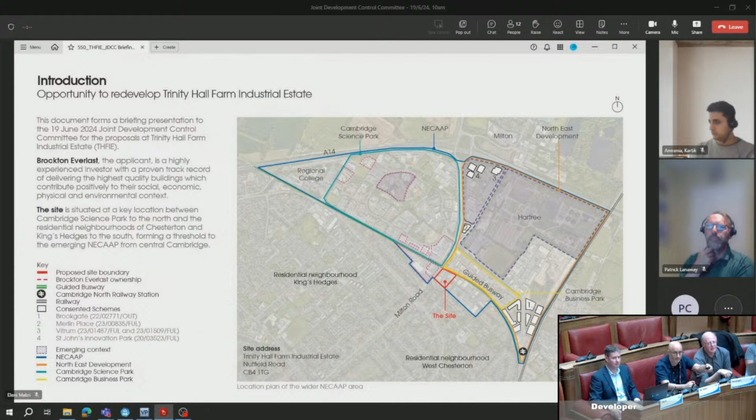This is a slightly more expansive view of the site. It covers a little over 3 acres and is 40% covered by buildings, predominantly low quality light industrial and commercial buildings. The balance of the site is made up of hard standing areas which are used for servicing the light industrial and commercial units and 158 vehicles.

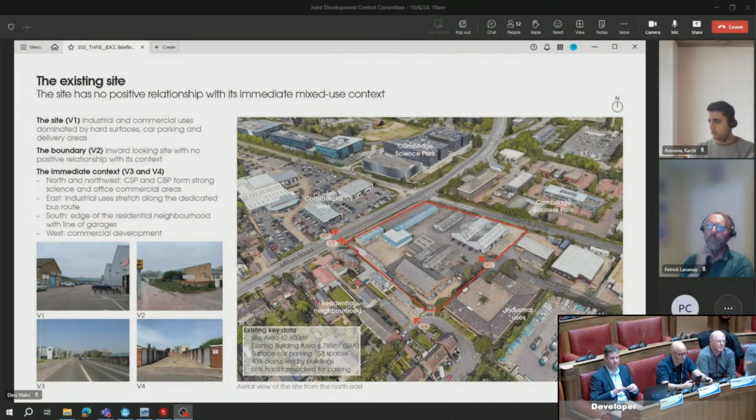We consider this to be a strategically important site that's definitely underutilised and fails to make any kind of positive connection to its existing and perhaps emerging mixed-use context. The opportunity or vision for us is to redevelop the site and deliver an urban quarter of best-in-class, highly sustainable science and technology buildings. But we want to make sure the proposals also positively respond to the site's distinctive and varied boundary conditions and take into consideration the wider current and future urban context.

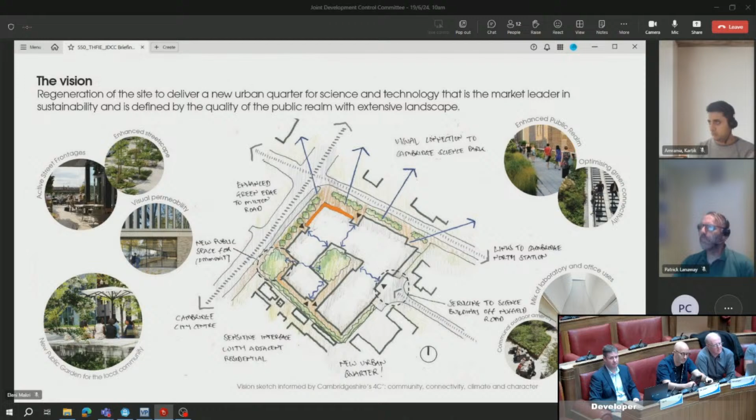I'm going to hand you over now to our lead designer, Gavin Henderson of Stanton Williams, and he'll explain in way more detail our design response.

Thank you, Richard. So Richard's outlined some of the key vision behind creating this new urban quarter. I'm going to talk about it in a bit more detail.

Firstly, I want to explain some of the key principles underpinning the scheme. Then we're going to walk you through key views of the scheme, all from street level. It's all about the human perspective, from the member of public or the building user. That's central to our approach. And finally, we're going to touch on some long-distance views, LVIAs and TVIAs, because those have been central to the discussion with the planning officers and setting the heights and massing of the buildings.

In terms of those key principles, sustainability is at the heart of our approach and of Brockton's vision for the scheme. This is a net zero carbon development, which aims to set a new benchmark in terms of environmental performance for developments in Cambridge. We're targeting the highest levels of accreditation and very high levels of performance. There isn't time to go into detail, but the key thing is all project targets exceed current planning policy and meet emerging policies.

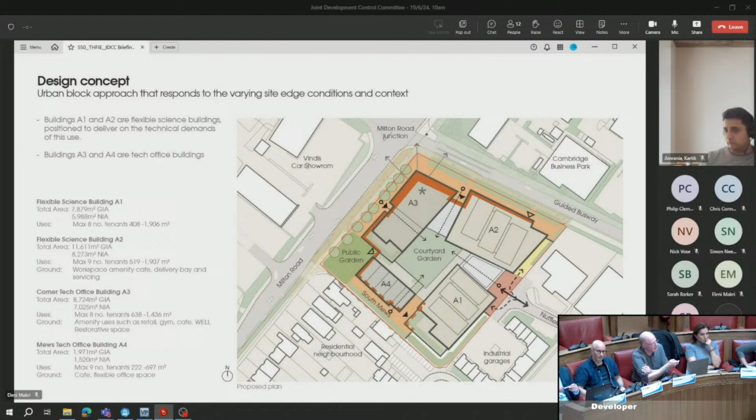The building we identify here as A3 is a corner building which marks that junction. We envisage this as a family of buildings, differentiated in language, but sharing a palette of brickwork and precast, which draws on the traditional materiality of the Cambridge context.

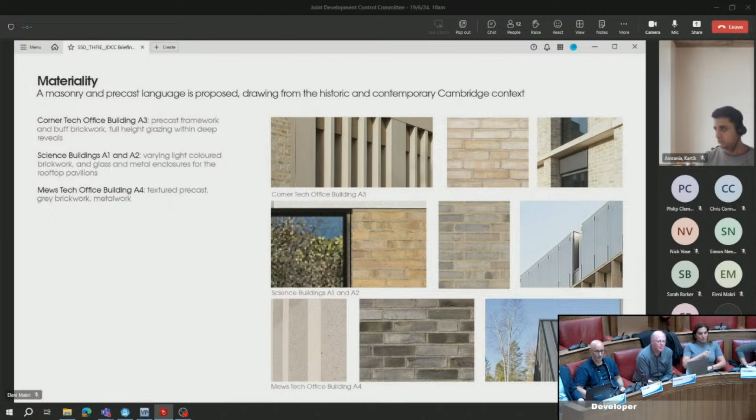And it's very much a landscape-led approach to the scheme as a whole. So 50% of the site is given over to landscape rather than building. That supports our biodiversity and SUDS strategies.

The landscape strategy is about enhancing the public realm and creating active ground floor uses, including cycle entrances and receptions and retail spaces.

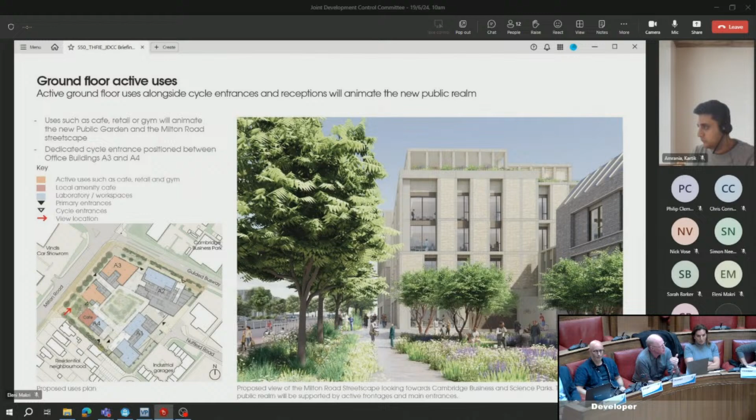This is the view along Milton Road, and that is part of this wider landscape strategy, about reimagining the public realm. So this is that public garden opening off Milton Road, and as a scale comparison, it's a very similar size to All Saints Garden in central Cambridge.

It's a very different context, and I'll come back to this space later, but a real opportunity to create a space for the community here and a space where the community engages with the scheme.

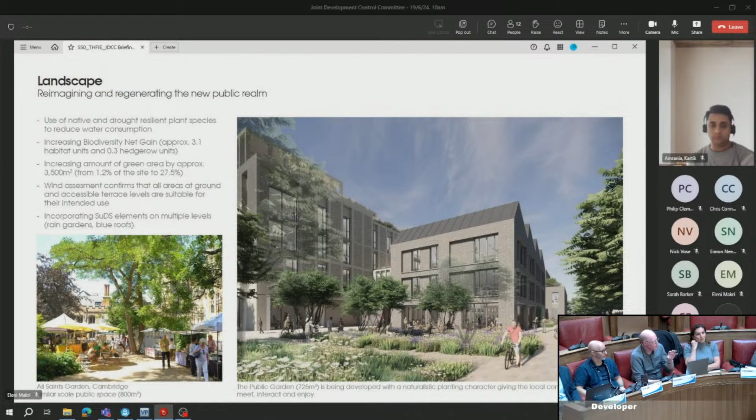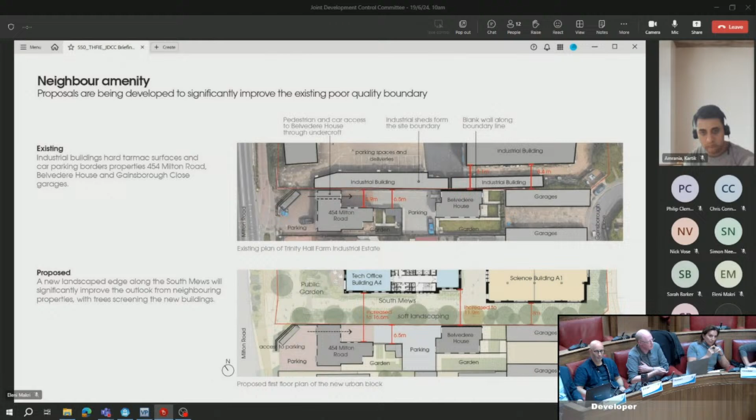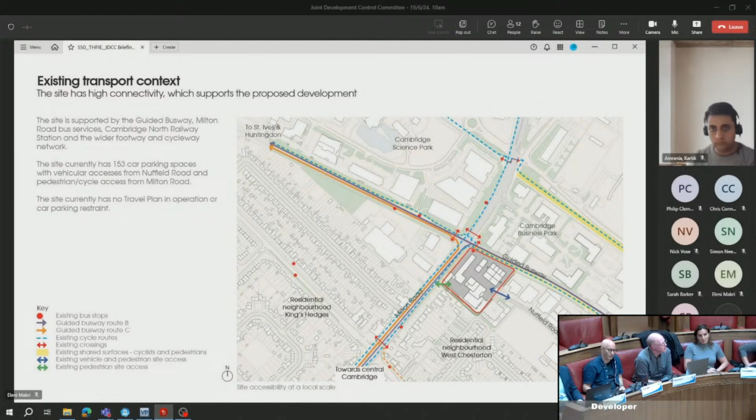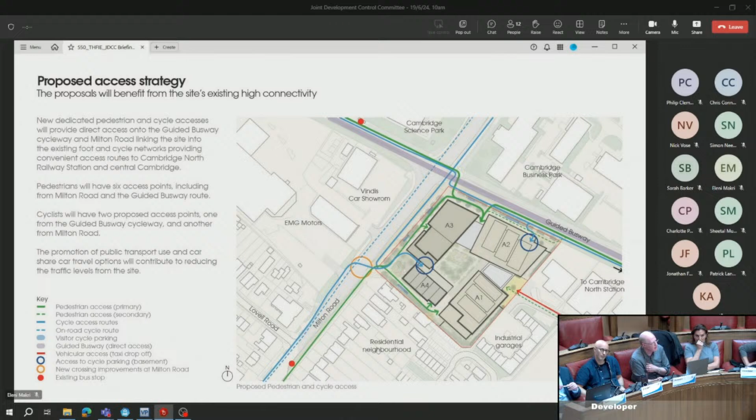Taking a step back now from the site itself, in the broader context, it has very high connectivity, which supports the proposed development. That's informed our access strategy to the site. We have principal pedestrian and cycle entrances on the guided busway and Milton Road, and a single vehicular access from Nuffield Road.

The high connectivity is also allowing us to create a modal shift towards more sustainable forms of transport, so you can see here a great increase in proportion of cycling to the site. We're also delivering a 50% reduction in terms of car parking on site, with a commensurate reduction in vehicle movements and trips. The remaining car parking and cycle parking is located at basement level, which is what's allowing us to deliver the very high quality public realm. And of course, we're encouraging the cycling through very clear, legible and welcoming facilities.

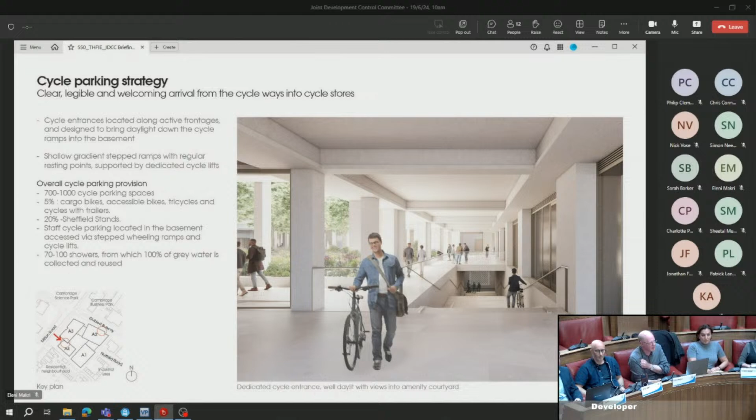This is one of the arrival points off Milton Road, heading down into that lower level cycle parking facility.

In terms of height and massing, that's been a key discussion with the planning officers. What we've agreed is an evidence-based approach, looking very closely at LVIAs and TVIAs, the long-distance views. So it's been an intensive and iterative process, and I'll come back to that later, and it's defined the heights of our scheme. At the lower level here, you can see a section that shows on the left the heights of our scheme in relation to other emerging projects within the adjacent areas.

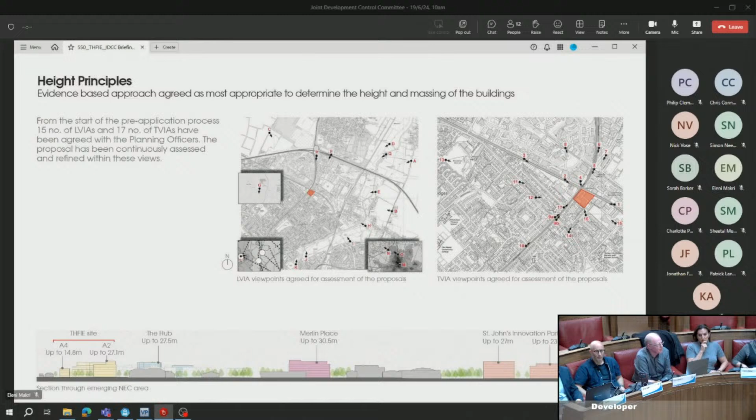I think key to this is that it's not a single height to all the different buildings in the block. It's very much a varied roof line, stepping up and down and stepping from taller buildings to the north, adjacent to the guided busway, and then lower buildings to the south, adjacent to the Chesterton residential area, which is what you can see here.

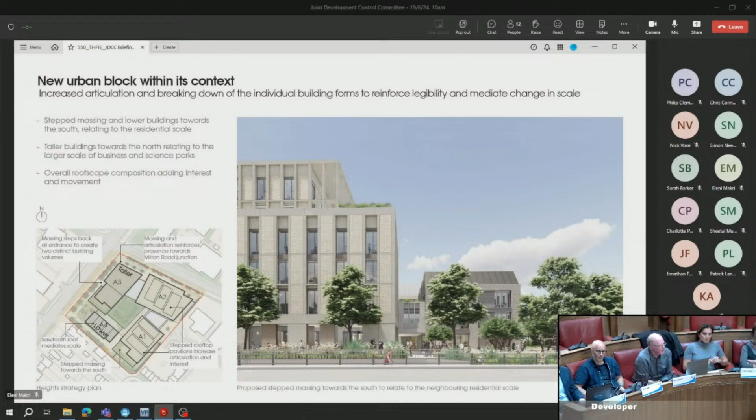Now I'm going to take you on that sort of ground level walk around some key views of the scheme. This is the new public garden on Milton Road. We're proposing a community-facing cafe that you can see in the building in the centre of the image. This is the most sunlit part of the site, and that building's set back 30 metres from the edge of the road, so it's well away from traffic and noise of the Milton Road boundary.

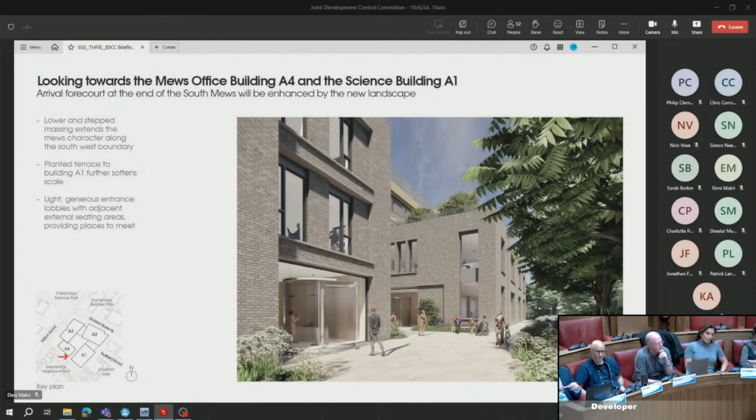The science buildings have a scale that's appropriate for the delivery of flexible, sustainable science space. This is on the Nuffield Road side. The vehicular entrance here is treated very much as a forecourt, a landscape forecourt with permeable views looking through into that central courtyard. So it's very important to us that this building doesn't have a back. All of these sides are important, and this is a significant communal entrance for the scheme between two of those main buildings.

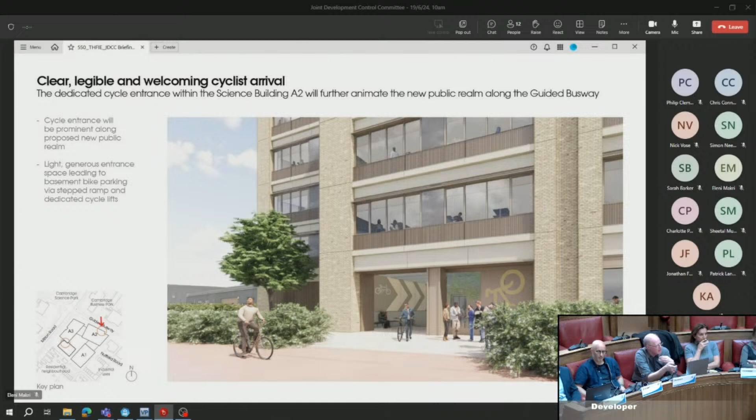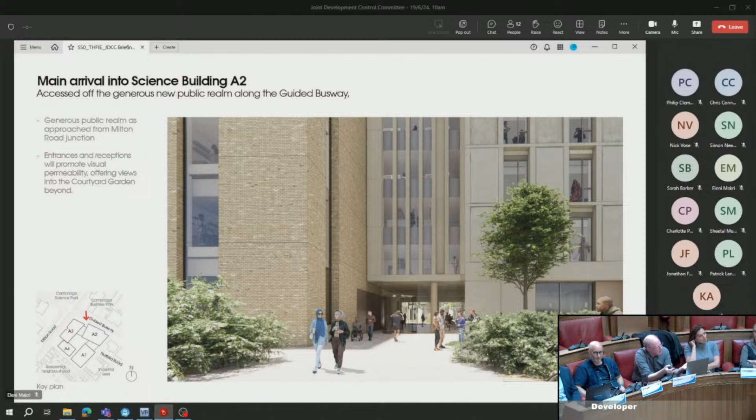I'm sure you'll be familiar with the guided busway. At the moment, the site is fully fenced to the guided busway, so we're opening all of that up to create more space for pedestrians and for cyclists. This is one of the primary cyclist entrances onto the guided busway. Further along, this is again one of the entrances into the science building, and you can see through, you get into the courtyard with this enhanced area of public realm in front of the building. It's a project where your experience of it, as in all buildings, is kinetic.

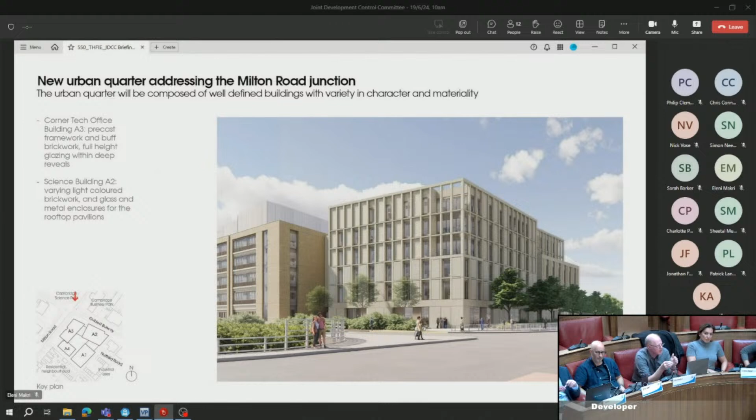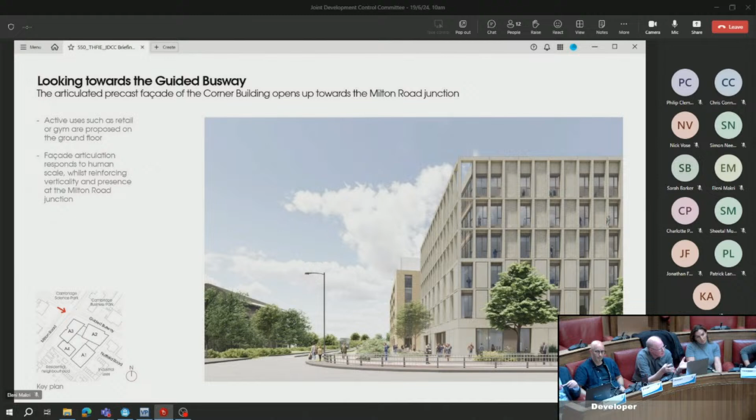You're moving around it. So here we're stepping back further along the guided busway. You can begin to see the way that the building breaks down into different forms and elements. As you move closer, the corner building is the most articulated building form and marks that important junction on Milton Road and the guided busway. It's differentiated from the science building on the left, and what we have is taller buildings facing the guided busway, and then they step down towards Chesterton to the south.

This brings us back round to that new public garden, where the landscaping, the substantial mature tree planting that we're proposing along the Milton Road edge, is also enriching that urban experience of the public realm and active frontages of the space.

We've actually looked at 32 different long-distance views, so we're not proposing to run through all of them here. The planning officers have identified 7 which are of particular importance, so those are what we're going to illustrate. As I said before, those are what have been defining our heights as we've developed the scheme. We've been working closely with specialist consultants who have assessed the impact of these different views. So the overall assessment of the townscape views is that the project has minor, or in some cases negligible, impact on the views, but a beneficial impact in terms of marking that important junction.

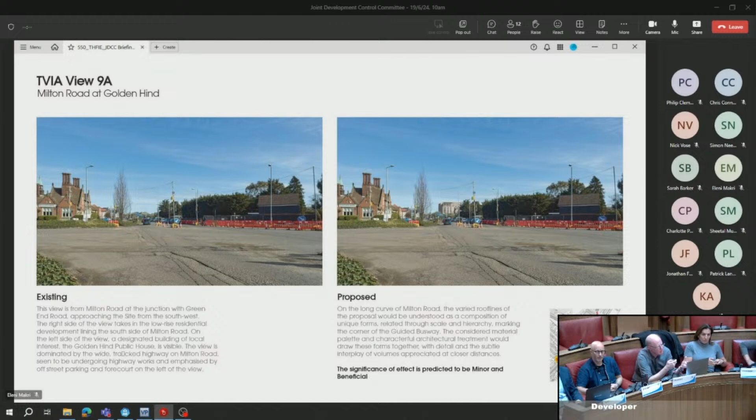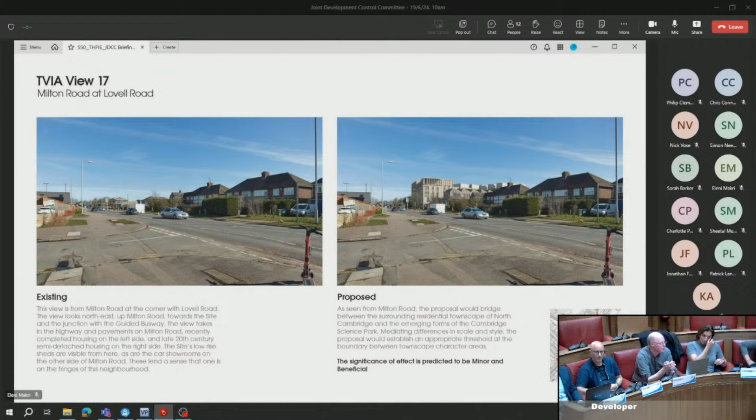So this is looking up Milton Road from near the Golden Hind pub, and as you move closer up the road, you can see how the roofscape is broken up with the lower level buildings in the foreground and the taller buildings behind. And here we're looking down Milton Road with the larger Science Park buildings on the right-hand side of the image, and the building straight ahead.

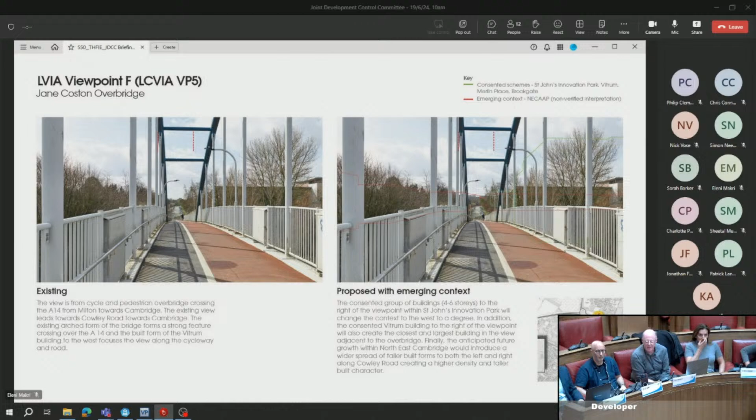So finally, in summary, I hope we haven't focused on these individually, but we hope that what comes across is that underpinning this whole scheme and stitched through it are the 4 Cs of the Quality Charter: the community benefit of the enhanced public realm, the active frontages, and the new public garden; optimising the exceptional connectivity of the site and using that to drive a change towards more sustainable forms of transport; the climate-focused approach to design and sustainability targets; and then, fundamentally, the principle that we see this not just as a series of buildings, but as very much creating a new urban quarter with its own character and a distinct sense of place.

Speaking now as Stanton Williams, that's something we are very excited about. We all know that the science economy is very important to Cambridge, and Cambridge has this very unique urban fabric, but they don't really come together in what you could say is the traditional science park model. So we feel this is an incredible opportunity to set a new paradigm for doing science in a more sustainable way and a more urban way, and integrating it into the vision for this part of Cambridge. So I think on that, I'd stop and hand over.

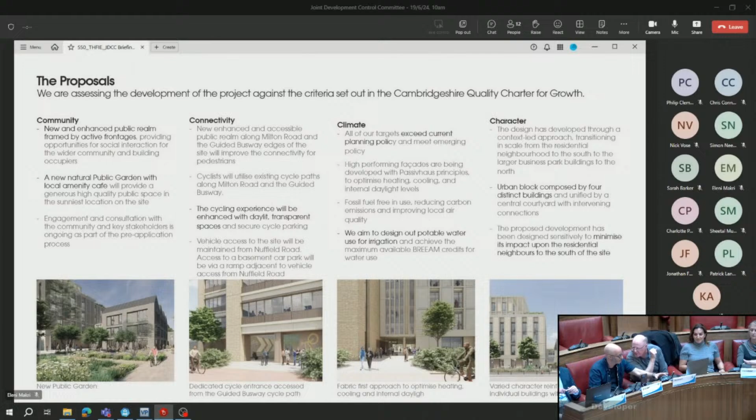Thank you for your presentation. I think that's unprecedented to finish within the 20 minutes, so I think you can claim an area record for that. Thank you, that's much appreciated.

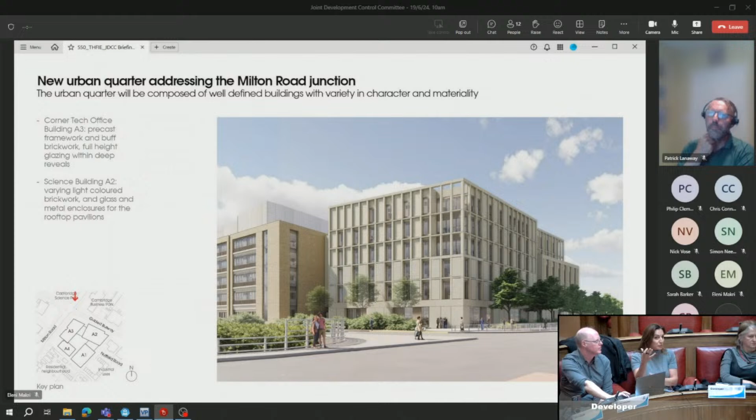A larger form that's appropriate to the corner, addressing the junction at Milton Road, facing here with the articulated open corner, with the facade in precast expression. The building is then broken into a smaller volume to the south, which introduces a further setback on the upper floor with the loggia, as seen in the last view. That gives the height difference you can see, so you've got ground plus 3 effectively as the facade on that garden.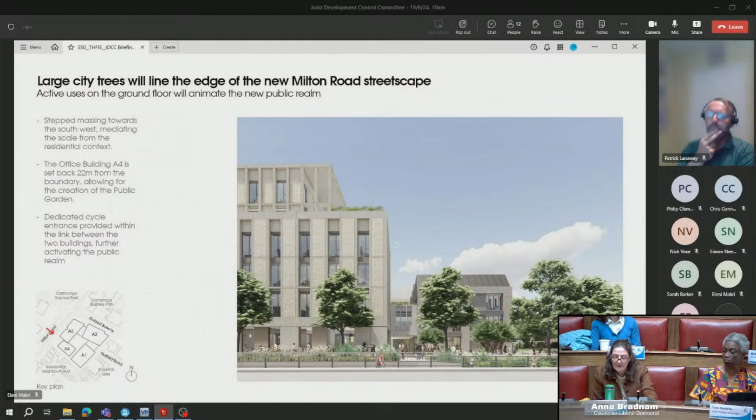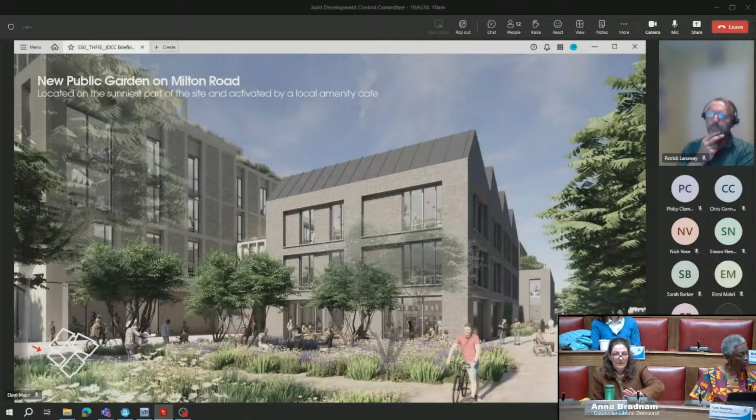Second question relates to the relationship between the Block 4 building, close to the residential properties on Milton Road, and how that would look from there. They've only had a building with a sloping roof down to the boundary - would we not have that impinge on their view much? But now they've got that on the other side. The previous slide you flicked past would have been useful - yes, that one.

The existing condition has a single-storey industrial shed along the boundary line, and then a taller building, I believe up to 11 metres high with a monopitch - an industrial use building, seen at the end of that photograph on the left. The site is currently dominated by parking and deliveries, and that's the outlook the current residential properties have. We're increasing the setbacks of our proposed building, which is ground plus 2 floors, with any plant room incorporated in this sawtooth roof form.

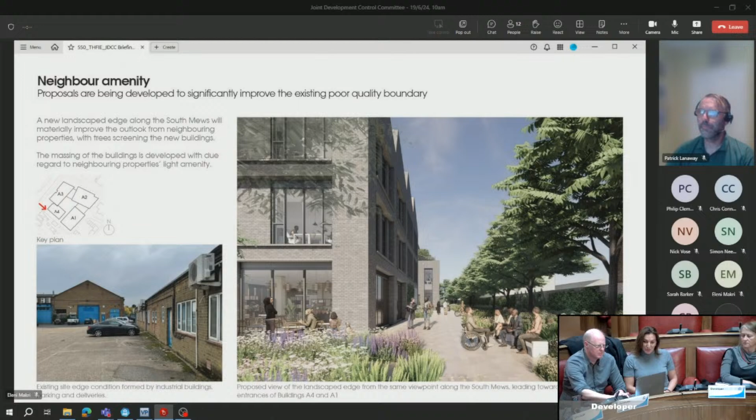So from the existing condition, where the buildings are on the existing boundary line, our proposed building A4 is 16.5 metres away from 454 Milton Road. Further along this Milton Road view, there's also Belvedere House, built on the boundary line, with a blank facade against the site line without any side-facing windows. Our proposed science building A1 has a lower form along the south mews, and the height of that lower volume is within the height of the pitch roof of the industrial sheds currently on site.

If I may add, in relation to the plan at the bottom, the existing relationship - at the top, 454, you actually access it via the dotted arrow, which goes effectively through the building. There's a first floor above, but the actual access goes underneath where you've got that longer black arrow at the top. So all of that area immediately adjacent to the site is manoeuvring space - the driveway through to the parking at the back. That property is principally facing front and back.

The site is almost due north of this, so there's no effect on sunlight. We've done a daylight assessment, a BRE assessment, which forms part of our overall assessment. The other impact we look at is outlook and overbearing, but the principal outlook is front and back - you can see the small green rectangle immediately behind the built form at 454, which is the garden area, also set off the boundary. The area immediately adjacent to the site is just car parking and manoeuvring space.

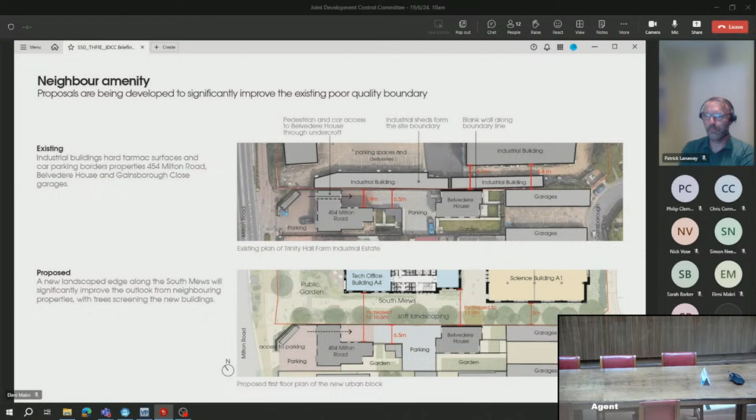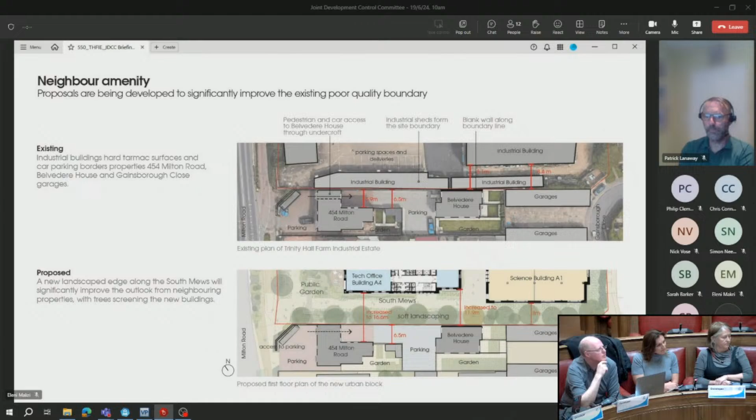Your permission, can I just ask a question about water? You mentioned that you were very mindful of water conservation, and mindful of the concerns we have in Cambridge about sufficiency of good quality water. You talked about collecting rain and grey water. Could you give us more detail about how you plan to do that, what you plan to do with it, and how you'll use the collected water? Grey water is notoriously difficult to deal with, so if you could explain that, that'd be helpful.

Sorry, can you hear me? It's a three-step approach to the water conservation strategy we're employing. Firstly, significantly reducing demand, achieved through low-flow appliances within the development. Secondly, collecting all the potential rainfall falling on the site, including through green roofs, landscapes, permeable paving and blue roofs, as well as collecting all the grey water produced through the development.

Grey water is from the showers and the basins - we are collecting all of it, all the water from the wash hand basins and showers. The combination of rainwater harvesting and grey water harvesting is essentially what allows us to achieve a 60% improvement over the BREEAM requirements. To get into more technical detail, it will achieve up to 90% of our WC flushing, which is exemplar in this setting. We will be achieving all water credits for BREEAM plus the one in innovation.

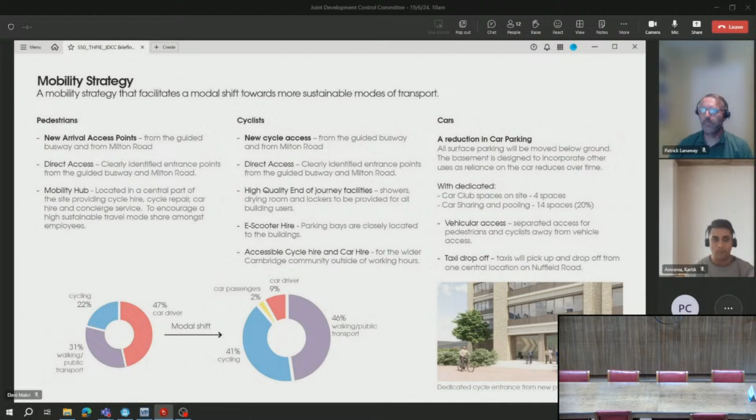And just very quickly on the basement, yes, it's also been designed with future uses. We talked about it converting to servicing for the use in front, additional cycle or servicing for that. We certainly see it having a different future during the lifetime of the development.

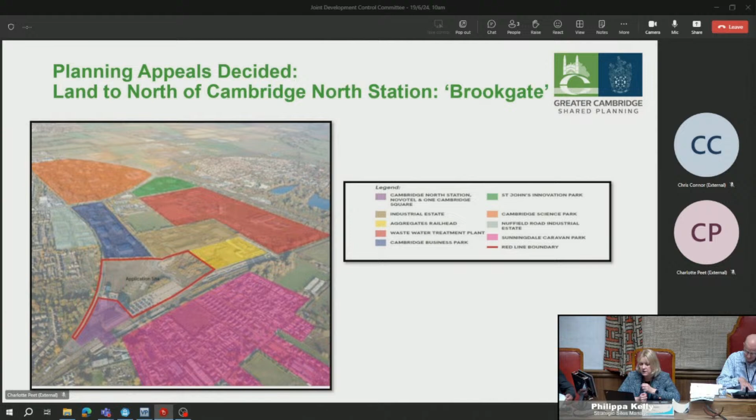If we could move to the next slide please. So the timeline with regard to the various main stages of this planning appeal. The appeal for non-determination was submitted to the Planning Inspectorate back in January 2023. And this was actually what we call a recovered planning appeal. It was called in by the Secretary of State. And this means that once the planning inspector has made their decision, their recommendation goes to the Secretary of State, and ultimately the final decision for whether the application proposals are approved or otherwise is within the Secretary of State's responsibility.

A public inquiry sat in June 2023 and it closed in October last year. There is a typo in my report at paragraph 3.10 - the close of inquiry was on the 19th of October 2023. And then earlier this year, on the 23rd of April, a decision letter was issued by the Secretary of State.

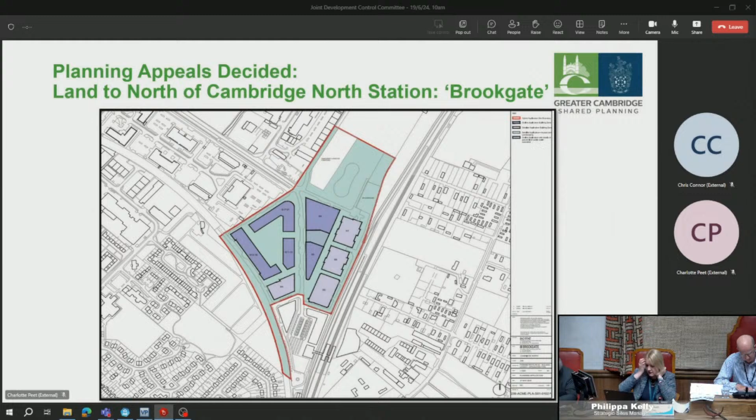The second reason relating to heritage impacts, again due to the height and massing of the proposed buildings, together with the siting of the buildings on the eastern side of the site again, would be a permanent change to the visual quality of the adjacent conservation areas. And then in design terms, it was considered by the council that the design of the proposals wouldn't provide a high quality public open space or a public realm which would result in a well-designed sense of place contributing to local distinctiveness. Also within this reason for refusal were concerns around the failure, in the council's view, to provide sufficient play areas for children.

Cambridge Past, Present and Future, who had objected to the planning application, appeared at the inquiry as a Rule 6 party, and the Environment Agency, who had also objected to the planning application, appeared as an interested party, raising concerns regarding the increased demand for potable water use and potential to cause deterioration to water bodies in the Greater Cambridge area.

The council did not put forward a reason for refusal based on water grounds. At the public inquiry, evidence was presented by all sides in front of the inspector, including evidence in respect of the water resource issue.

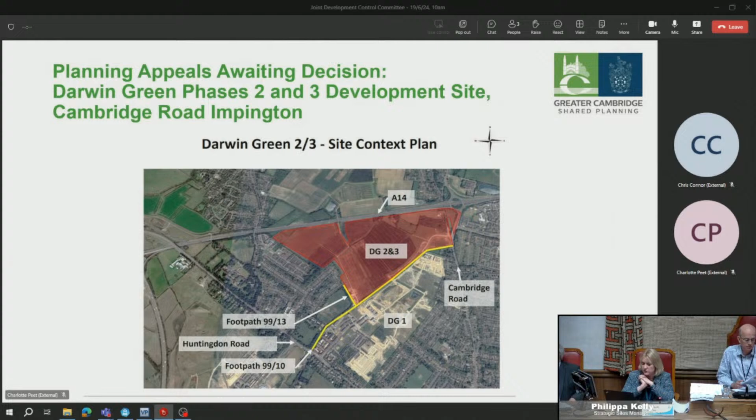A non-determination planning appeal was submitted in July 2023. Then in autumn last year, at the October JDCC meeting, members considered the non-determination report and the local planning authority didn't support the proposals due to concerns that the water to the development site could not be supplied sustainably and would cause harm to the environment by reason of impact on groundwater bodies. That was the position the council put forward at a public inquiry held in January this year. The council's position at that inquiry was that once it could be demonstrated that the demand for potable water to which the development will give rise can be supplied without causing harm to groundwater bodies, permission should be granted without delay. The council relied on the evidence presented by the Environment Agency, who had objected to the application proposals and appeared at the inquiry as a Rule 6 party.

Since the inquiry closed in January, the council has been asked to comment on a number of published documents, including the March 2024 joint statement, the ministerial statement on addressing water scarcity, the Brookgate decision, and the revised draft water resource management plan, which was published at the end of February. To note, the appellant did put a cost claim against the council at the end of the public inquiry in January, but the appellant withdrew that cost claim following the council's acknowledgement of the Brookgate appeal decision. So that cost claim against the council was removed just last month.